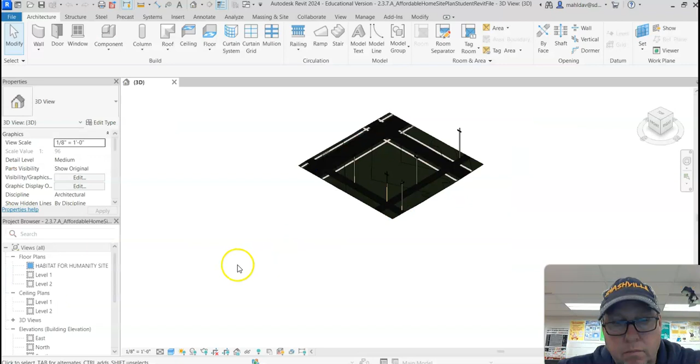When I open this site plan, it's just going to open in Revit the way that you would expect anything to open in Revit. It's going to ask if you want to upgrade. I'm going to say yes. Once it opens, yours will probably look something like this. I'm just switching views quick so we can see what it looks like. And I am going to go to the hidden line. It probably looks like that when yours opens.

And the first thing we're going to do is link our house to this site. That part's not too hard. In order to do that, under the tabs, I'm going to go up here to the Insert tab, up at the top, click on Insert, and then I'm going to link a Revit file. So click on Link Revit File, click, and when I do that, I just need to navigate to wherever that

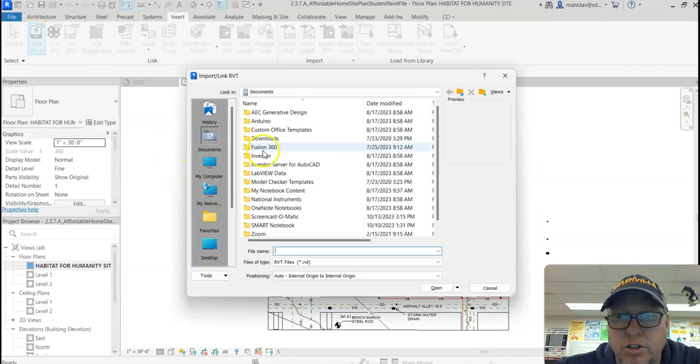file is. So my file is on the desktop, and when I go to the desktop, I'm going to find my Habitat for Humanity folder, double click to open it. And make sure you pick the house file, don't pick a backup file. So I'm going to pick my house and open it. And when it comes in, it's going to be right there in the middle of my map, which is perfect. I can move it around to wherever I want it.

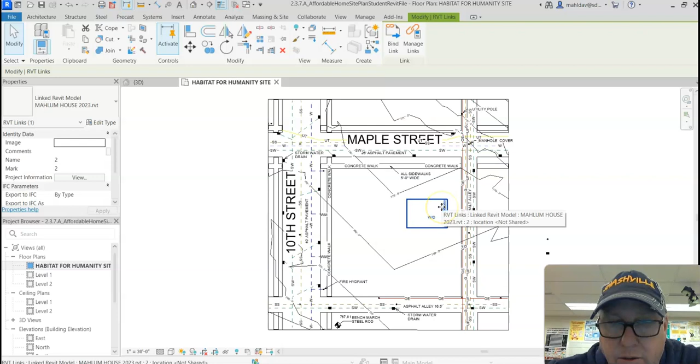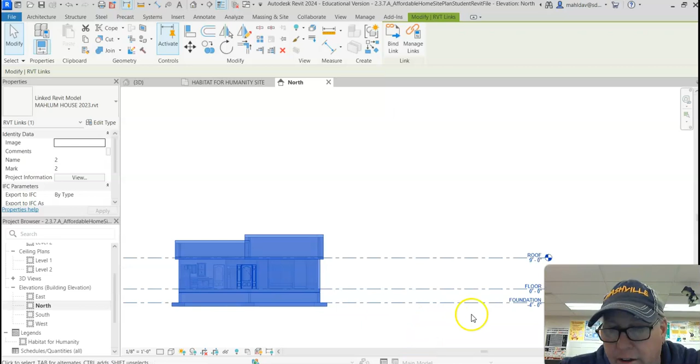However, one of the things that's interesting is the house is not at the same elevation as this site. If we look at these elevation lines, this says 770, 769. If I go over here to elevations, click on any one of them, east, north, south, I'm going to click north. My house is actually way down here because I built my house at an elevation of 0 and the site plan is at an elevation of 700.

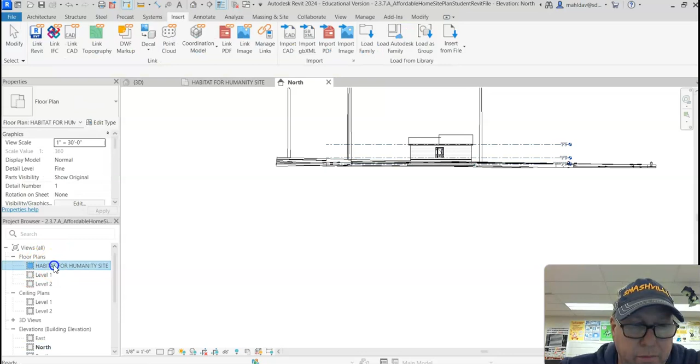So to move that, you just grab the house and slide it on up, taking it all the way up. And now that I have it close, I zoomed in, I'm going all the way up. Boom. Now my house should be visible on the plan. I'm going to go back to the floor plan for the site, and there it is. It looks beautiful. This is where I want my house to sit, somewhere right in this area because that's where I like to put my house. And I'm going to kind of fine-tune it here in just a second.

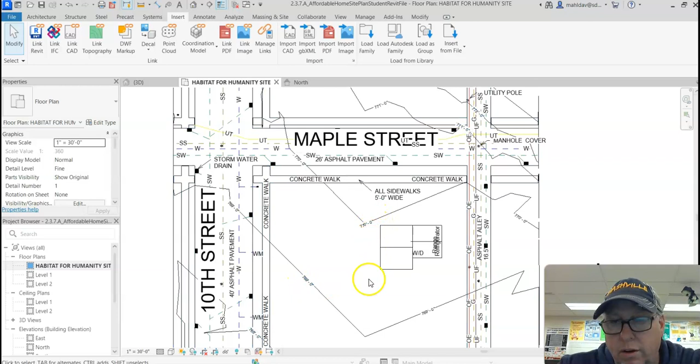But before I do that, I'm going to have to play with the elevations of my site a little bit. This is 770. This is 769. So there is a 1 foot drop as you go across the lot. It's actually about 2 feet because there's a 768 down here. So the lot does slope in this direction from the north down to the south.

Right around the house, you want that soil to be graded so that it's level. So I'm probably going to go 770 all around my house. And then I'm still going to let the water run off in this direction. But immediately around my house, I want that to be 770.

And this is the part of Revit that's changed, because there used to be something in this massing and site called topography, and that no longer exists. Now it's Toposolid. And a lot has changed in how you use the Toposolid tool.

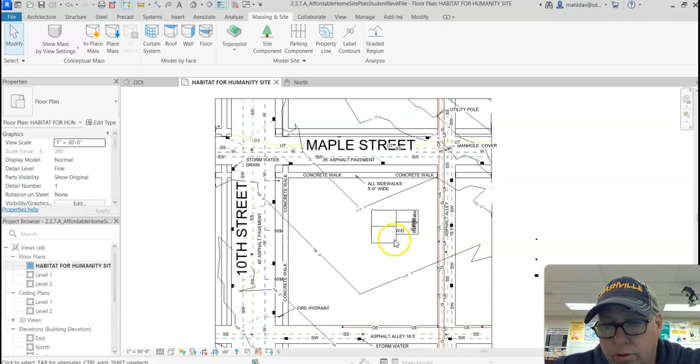As a side note, the linked file that's here right now is simply just a picture of the house. I can't really do anything to manipulate this. I can't move things around. I can't take a couch and move it from one place to another. This is just simply a snapshot of what existed when I pulled it in.

If I wanted to change something with my house, I would actually have to go and close this, save it and close it, open the house, change whatever I want to change, and then I would have to relink it here and make sure everything works out the way that you want it to.

One last thing about inserting a house into Revit onto the site plan. You can't have your house and the site plan open at the same time since they're linked. If you do that, you're going to confuse Revit and the link will be broken. And then you have to redo it anyhow. So don't ever have your house and the site plan open at the same time. You either work in your house or your site plan, one or the other.

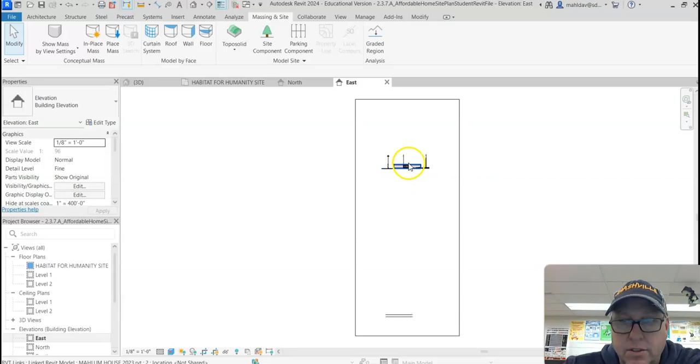So since I'm going to change the topography to be 770 right around the house, when I'm fine-tuning where I want it, this is where approximately I want it. I am going to go to an elevation again. And when I do that, I find it's easier to look at this as consistent colors, or even realistic, instead of using the hidden line because it's too hard to see what's going on here. So I do switch it over to realistic or consistent colors.

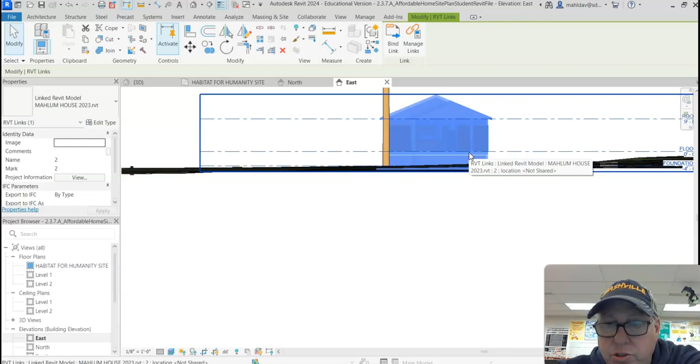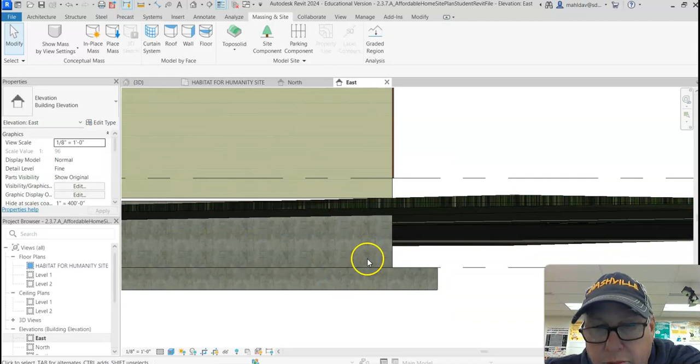And I am just going to drop my house down into the ground a little further so that I get the front edge real close to where the ground is. See how the ground is sloping as I go down the hill here. So I want my house to be down a little bit further. That's probably pretty good right there. So my foundation is underground and the house is sitting above ground. All right, back to my site. I have my house in the ground and above the ground exactly where I want it.

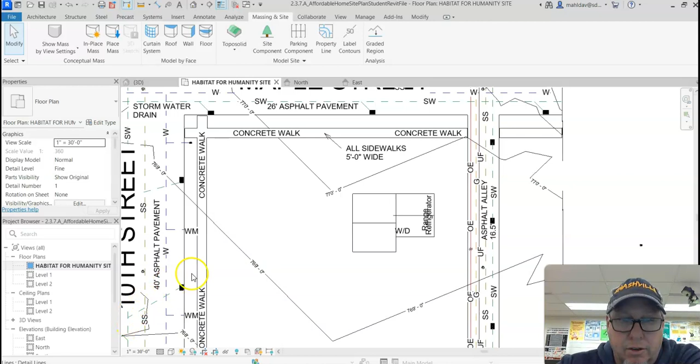To change the topography of this, I'm going to use this Toposolid tool. Okay, so since this site plan was built using the old topography tools and the new tool is the Toposolid tool, I kind of have to trick it into creating a new layer. So I'm going to go up here to Toposolid and I'm going to click right underneath it and I'm going to say create from sketch. So it's almost like I'm pretending like what's there doesn't exist.

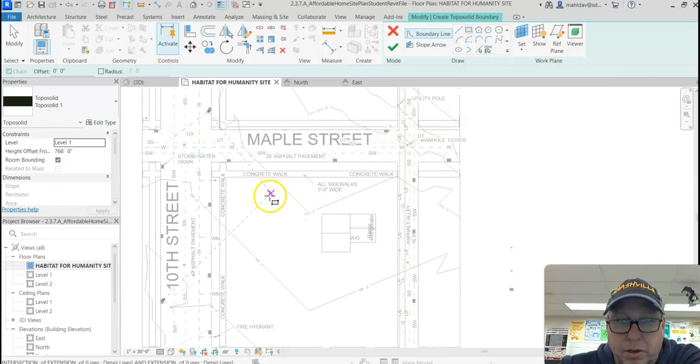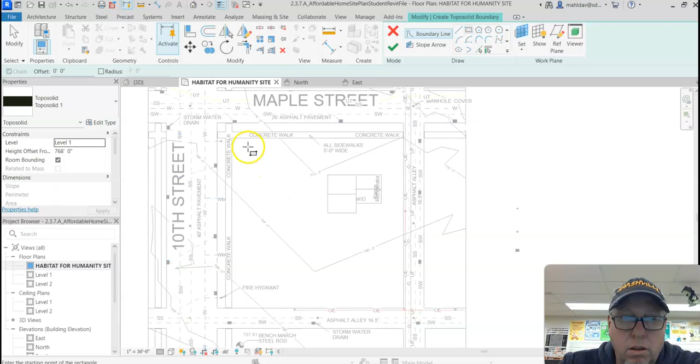And when I create from sketch, I'm just going to use the rectangle tool and I'm going to click that and then I'm going to come down on my map here. I want my setting over here to be at 768. So in other words, I'm picking the lowest number. So I'm going to put a whole square in here underneath the square that's there right now, and the whole thing is going to be at 768. That's my goal.

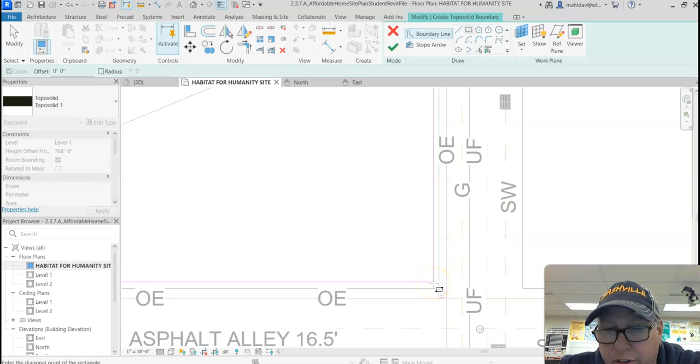So I'm going to go up here and I'm going to start in this corner. I'm going to get real close and I'm going to click and I'm just going to put in a whole layer underneath what's there. So I'm kind of tricking it into making a new area. That's good right there. I don't need to go perfectly right to the edge. I mean, I can if I want to. I will, I suppose. This whole area is now at 768, and I'm going to say that I'm done. So I'm done with that.

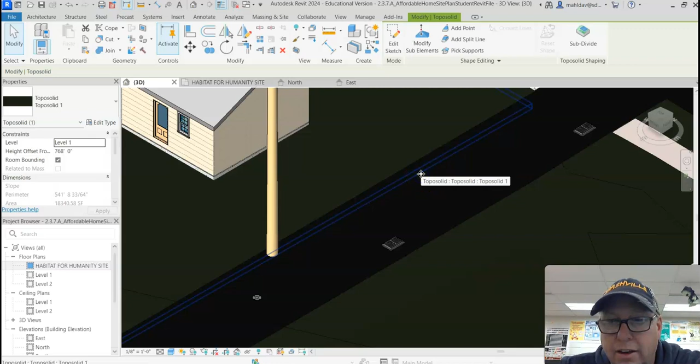If I go to look at this as 3D, which it's hard to see the colors, I can see that I have that layer right there now. It's right there, and I can click it. And when I click it, I can do things with it. So I'm going to hit escape. I'm going to click on that layer. See that layer? It's right there. I'm going to click it. And I have some things up here now where I could edit the sketch that I just did. It's just like editing any other sketch.

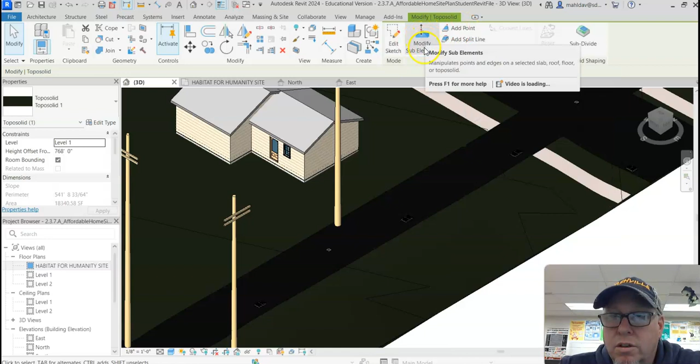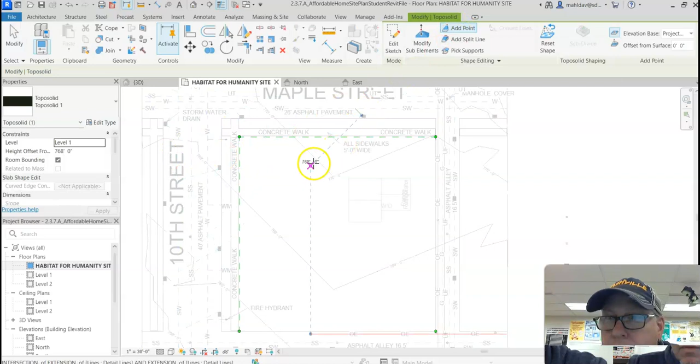Or I can add some points and I can modify those. So what I'm going to do is I'm going to choose to add some points. I am going to go back to this site plan like this. And I'm going to add some points. I can see that that's the layer I'm modifying right there, and the points that I want to add, I'm going to start at 770. See how it says 768 right now? It's because that's the number that's over there.

So, I don't know where my layer went. There it is right there. Missed it. There it is.

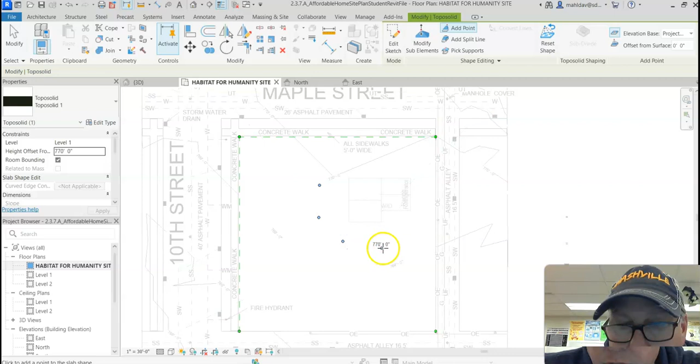I'm going to add the point, and change this number to 770, and hit apply. So now on my map I can add a point at 770, say right there, and one right there, and one over here, and make the area around my house be 770. I'm going to go way over here on the drive, because I'll probably put a driveway in there somewhere, and then this part of my map was already at 770, so I could follow that line along. That's not going to change anything.

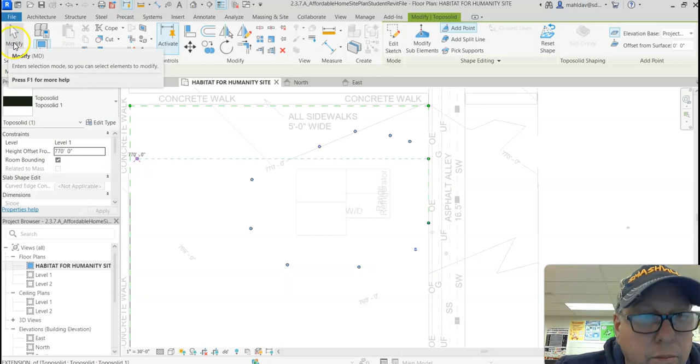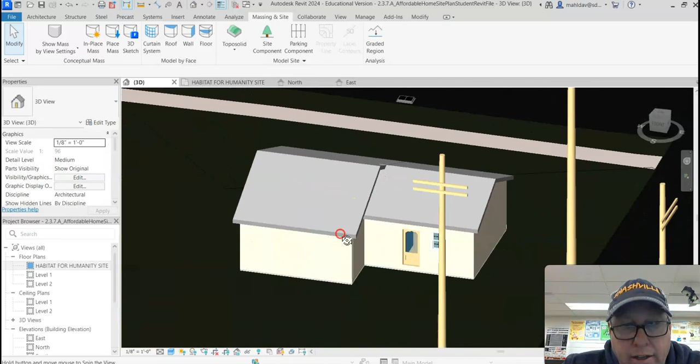If I hit modify now, up in the upper left, I get all those at 770. So the topography has now changed. If I look at the 3D and go all the way around my house, I no longer see that slope from the front to back.

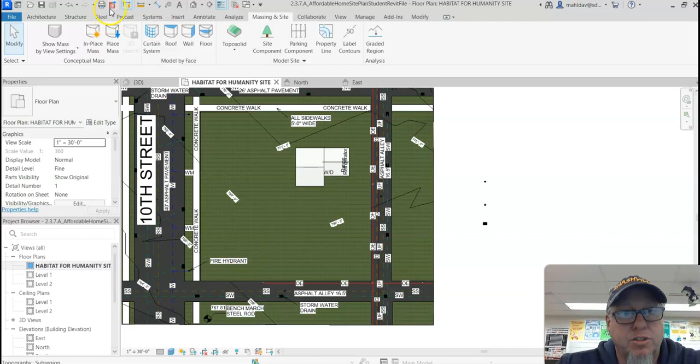I now have a nice steady surface all the way around my house. Lastly, if I want to put a driveway or a sidewalk in at this point, that's very simple to do. The easiest way, and I'm not going to make this harder than it needs to be, is to just put in a floor. We could split the surface and make a new surface with concrete, but it's easier to put a floor in. At the end of the day, nobody knows the difference for how that piece of concrete got there.

So under architecture, I'm going to go over to floor, and draw my initial driveway, which I want to be somewhere like down here. So I want it to go from here up onto my house, maybe here. I'm going to make sure it's wide enough when I get a chance.

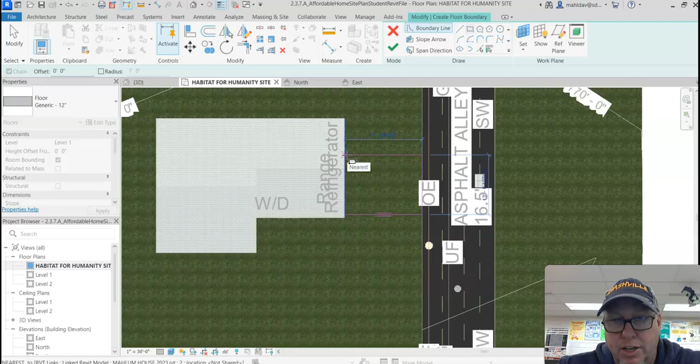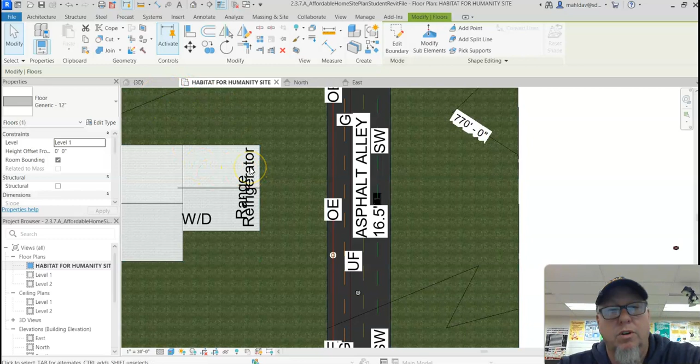I can't see the number there for how wide it is. So 17, good enough for the example here. And when I hit enter, realize what I had done - my generic floor just went in at a level of 0. So if I go to the elevation and zoom way back, there it is, way down there.

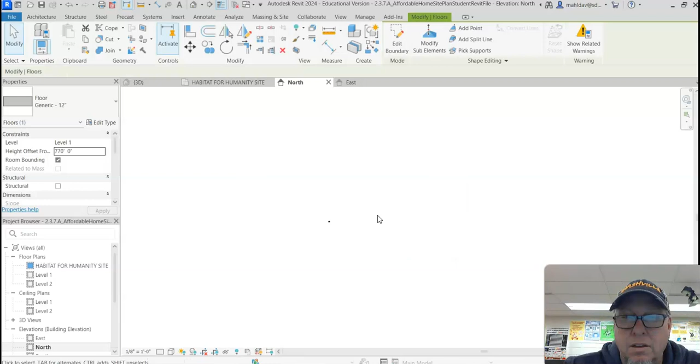I'm going to change that offset from 0 to be 770, because that's how high my site is. And it should be up there now. There it is. So that's my concrete driveway.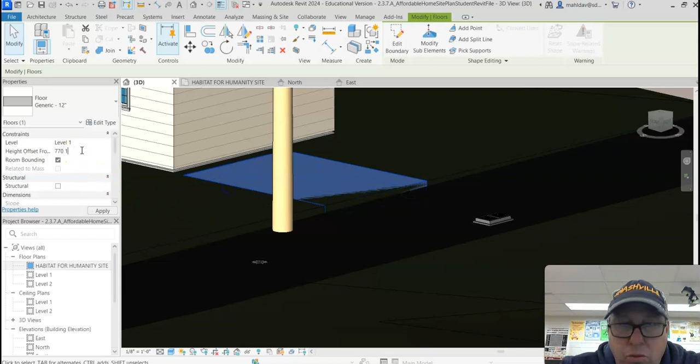If we look at it in 3D, right now it's at the same level. So maybe I'm going to go 770 1 so that it's 1 inch above. Then my driveway's sticking one inch above the grass line, and I can park cars and stuff on it.

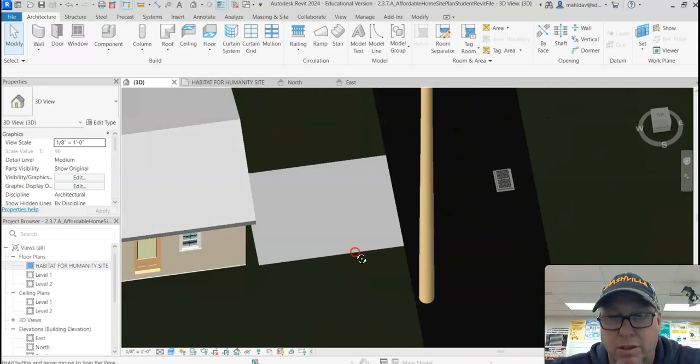If you want to, you can make this super fancy and put in the little lines you'd see on a real driveway. Or I could go in here and edit the boundary, and I think when I'm editing the boundary, it's way down there still, which is fine.

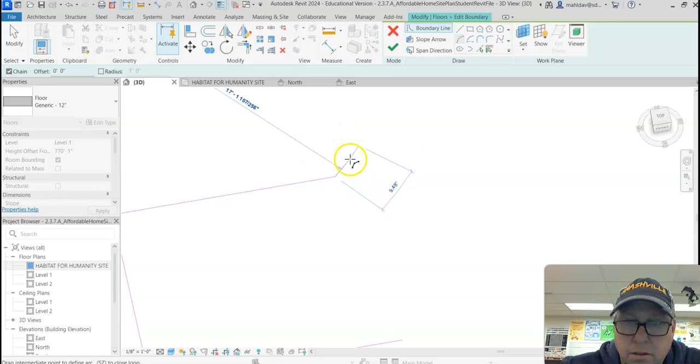I can delete this line. I'm going to pull this back a little. Put a little curve in. Make it look real nice, like a driveway. Perfect. I'm going to go way over here.

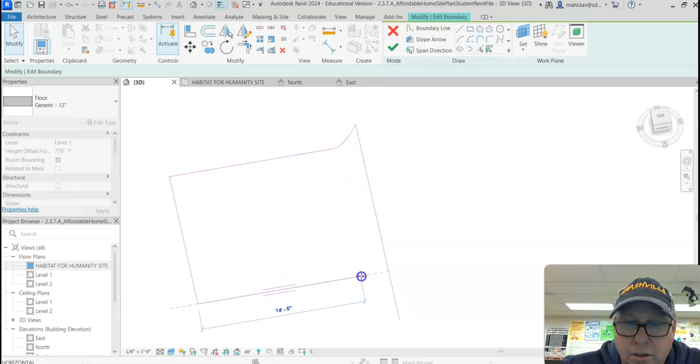Oops, I don't want a 3-point arc there. Pull this one back a little so that it's in line with that. This is called scrubbing, where I can find the end point of that one above it. Oh, well, let me scrub that one. Probably close enough.

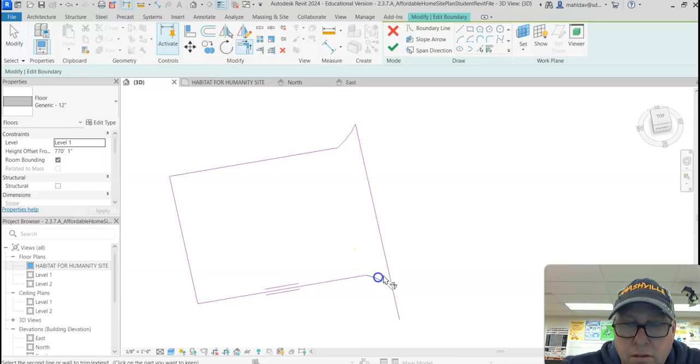And now when I hit done, if I look at what it looks like on my site, I now have a little flair that I added to it just to make it look a little nicer.

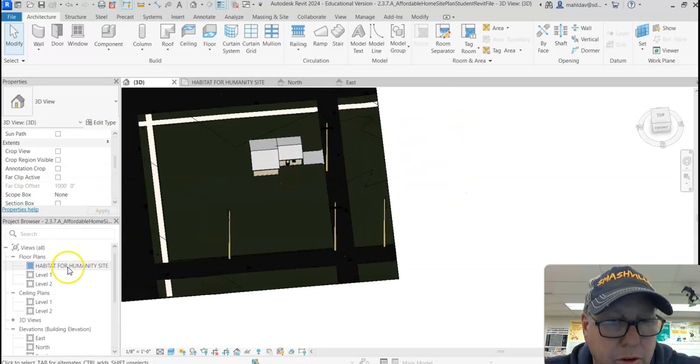If I want to do a stoop or a sidewalk, same thing. I just want to make that generic floor a little bit thicker so it gets all the way up to my house. I could just do it at 770 right away. I'm going to go to my site plan like this just to put that front door step on.

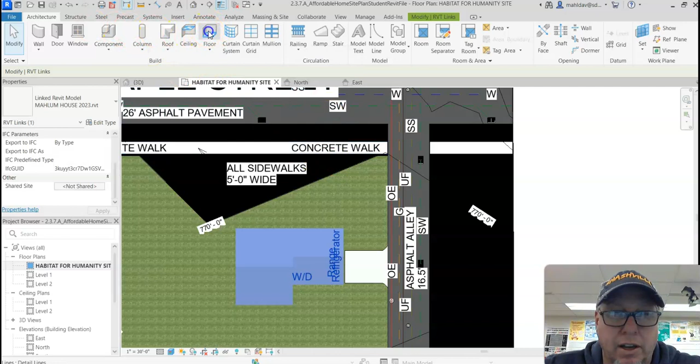Not sure exactly where my door is here. Try to see if I can't see it. So this might take a little finagling, but you'll get the idea. At this point, you probably don't need to pay too much more attention to what I'm doing. I'm going to click on floor. If you think you're ready to go, you could probably go and get started with some things.

I'm gonna make a 3-point. I think my door is like somewhere right in there. Just gonna make a sidewalk. Beautiful.

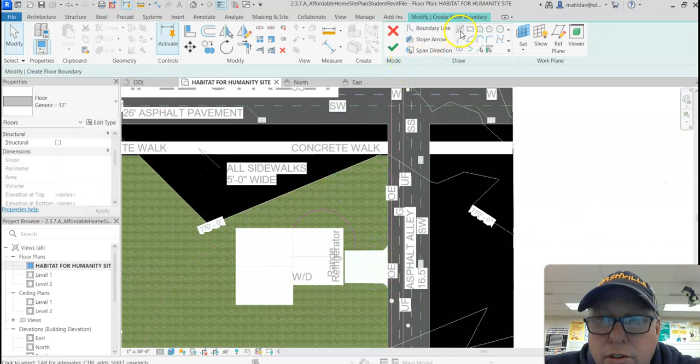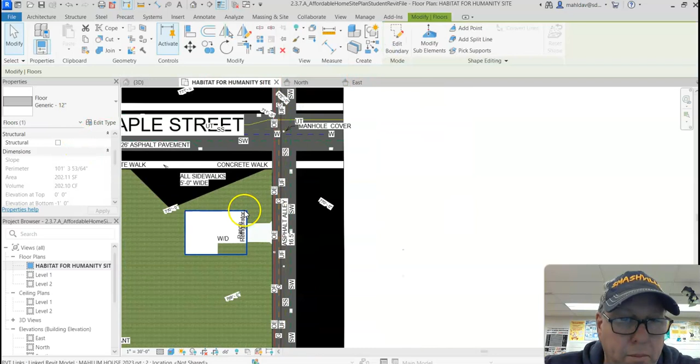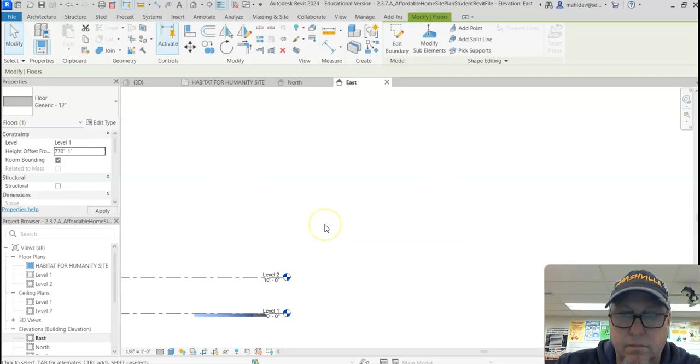And it's going to be way underneath again. So if I look way down underground, there's my sidewalk. I was pretty close to where the door was.

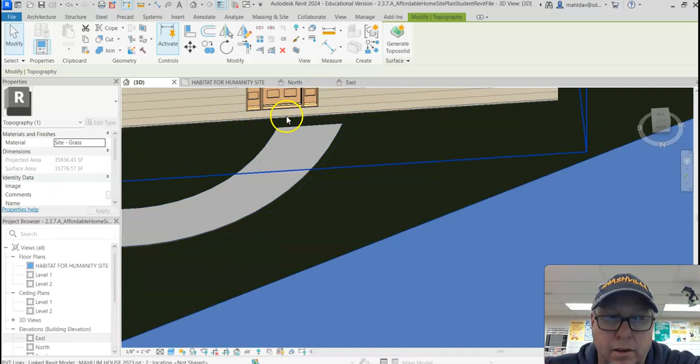And you'd have to play with it to get it to line up. I would actually move it out a little bit and put it right where my, I'd put a little stoop on there. I think we actually need a ramp, according to the Project Lead the Way guidelines. But basic idea, I think you got it.